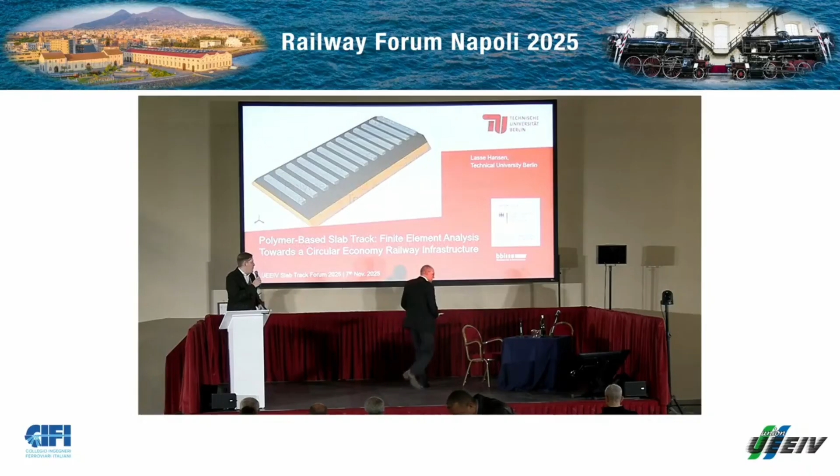Yeah, thank you very much, Olaf. I hope you enjoyed your lunch and you're feeling energized for the last session. At this point, thank you very much to the organizing committee. I'm really enjoying the conference so far. And yeah, lunch was great, but it's not the only thing which was great. So thank you very much at this point.

I will go into a polymer-based slab track, like it's written here. The idea is maybe on this first slide, and I will go through that and show you what the idea is and what I'm doing at the moment at Technical University of Berlin.

Of course, like Olaf said, slab track could be implemented into public transport and into high speed as well. And because the system is new, we know composites maybe not having, or material quality is an issue sometimes, especially if you're inventing new material compositions. So a first step could be in public transport because of lower axle loads and lower speeds, and that's why I'm going to present it to you now.

As I said, the first idea was when I was working for Deutsche Bahn at the high-speed line between Berlin and Munich. Much slab track was implemented or installed, and at the same time polymer sleepers appeared. And I was thinking about, in view of circularity, in view of resource usage, in view of elasticity, if it's possible to combine polymer material, composite materials with slab tracks, and implement it not just in ballasted tracks, but also in slab track.

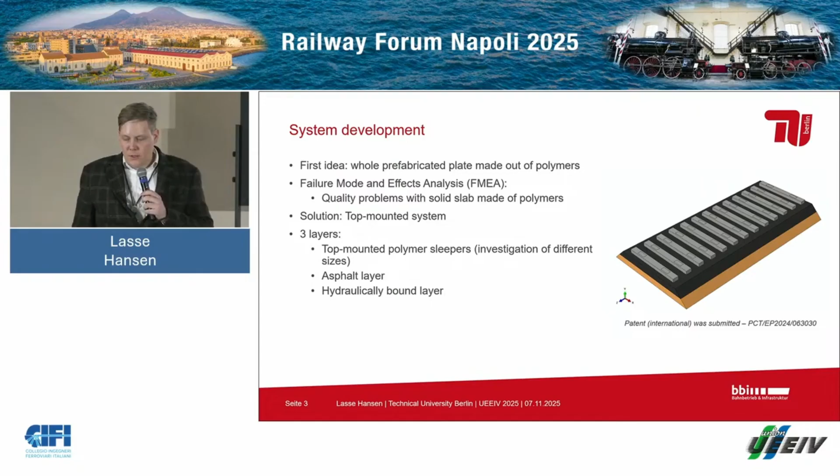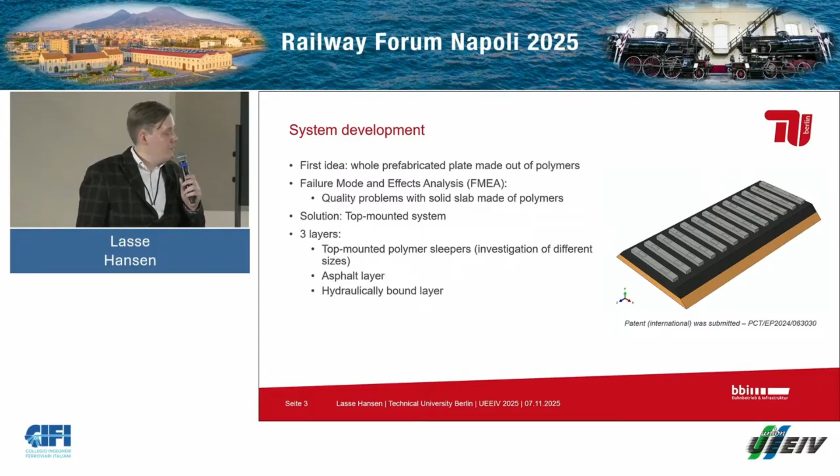So the solution, the step was to go into a top-mounted system. We also heard about some systems presented here. And asphalt has good circularity, also within streets it's well reused. So the idea was to substitute the top-mounted blocks with composite materials. In total we see on the right the 3 layers: the top-mounted blocks or sleepers, then the asphalt layer, and the hydraulically bound layer.

Then the title is FE analysis, finite element analysis. What you need for that is material data. Thanks to good literature, Professor Freudenstein is here, so thanks for the work, I could look up many things, also from Mr. Eisenmann on asphalt layers, hydraulically bound layers, also elastic foundations, and in the guidelines and standards of DB, and also guideline 16,432.

The Euro standard, European standard - you can see these different material data here. On the top, I wrote down sleeper composites. As you may know, there are different producers of sleepers made out of composites or polymers.

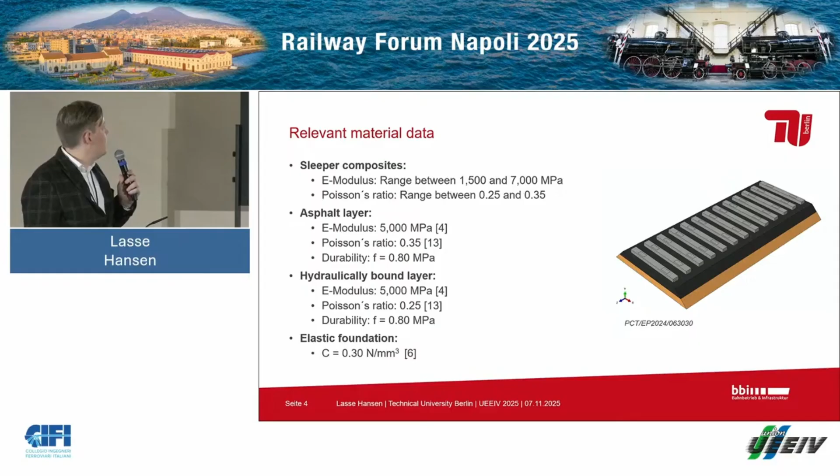So it's often a range, because it's depending on the material mixtures, for example which E-modulus or Poisson's ratio is appearing. Based on literature and material data, there's a range between 1,500 and 7,000 megapascal in E-modulus, and a range between 0.25 and 0.35 Poisson's ratio, based on how the mixture of these composites is at all.

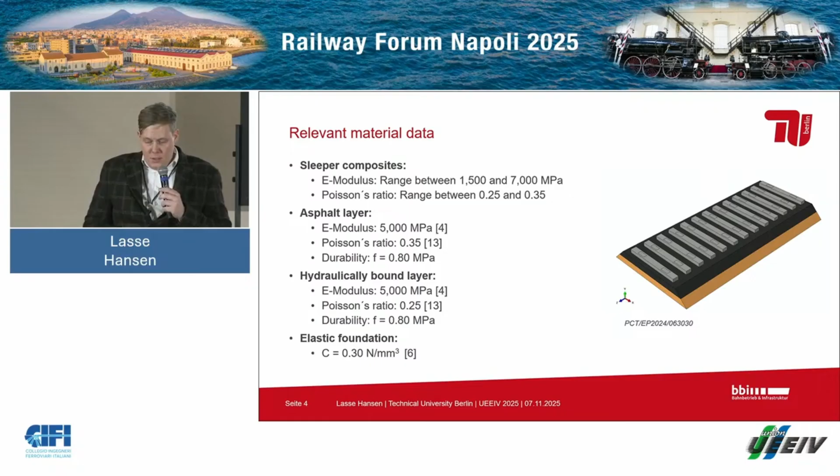Second, the detailed material data. So what we did - we have a material which is combined, or which contains recycled glass fibers out of rotor blades, and also recycled polymers. We did some testing, including dynamic testing, with a specimen to get the material data.

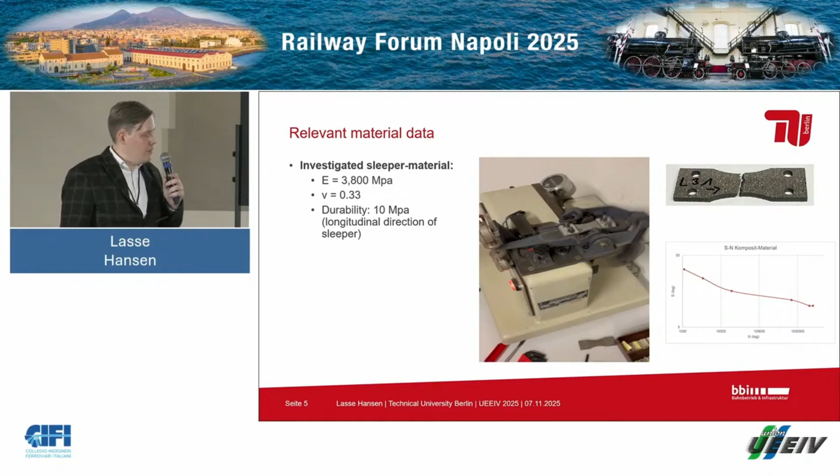On the right you can see a Wöhler curve. Our investigated material has an E-modulus of around 3,800 megapascal, and a Poisson's ratio of 0.33. We found with this dynamic fatigue test that around 10 megapascal is the dynamic durability. So these material data got into the analysis.

Then, as I said, I based that on what is according to guidelines, and there you can find the different loads per rail seat. You can see the basis is of course the UIC 71, especially if you're going to high speed or big trains, I would say.

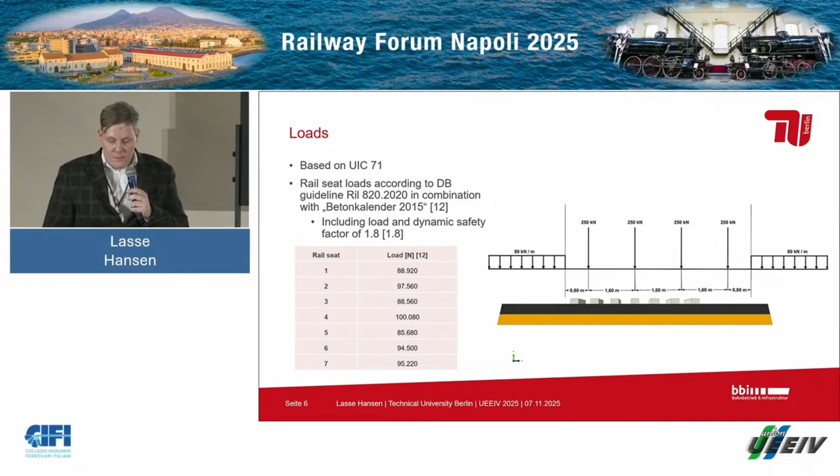But it's interesting to look at this dimensioning and maybe compare it, or transform it, to public transport as well. For the dynamic safety factor and also for load factors, you can add these 1.8 safety factors, and then these loads appear per rail seat, and you should focus on 7 seats.

Yes, so the dimensioning at all is based on the beam on Winkler foundation, because we're having this asphalt layer, and it was also transferred to railway by Zimmermann and then to slab track by Eisenmann.

And it's interesting to know if the appearing tensions within the supporting layers, assuming the loads, are lower than the durability of this material, and the same for the block which is top mounted. These two parts were analyzed differently.

And then also verified against the laboratory tests we did in the end, to see if the analysis, or the FE analysis, is sufficient.

So here are some results for the supporting layers. As you can see on the right, these are the two supporting layers. The load is applied directly on top of the asphalt layer because you want to get the tensions in the worst situation, I would say.

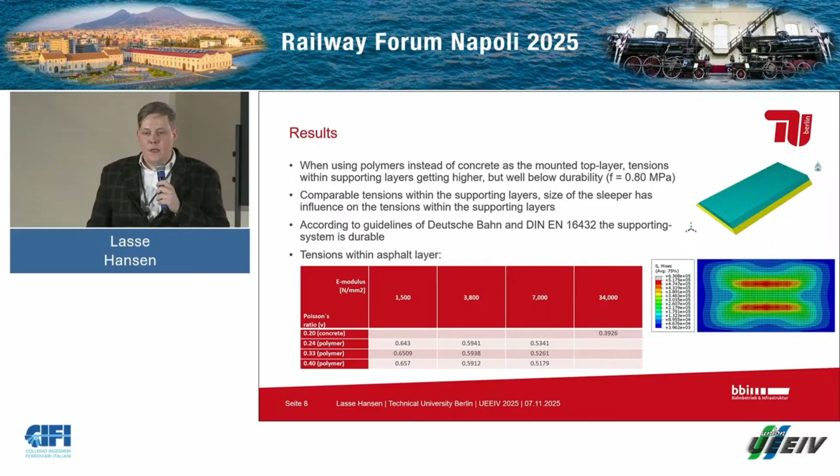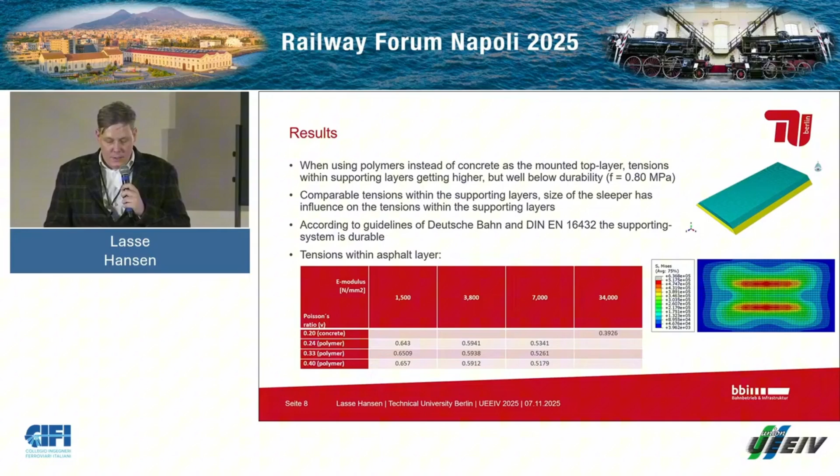It has to do with the load capacity, or the load spreading, and the elasticity of the block on top, but at all, it's well below the durability.

Then second, the top-mounted sleeper needs to be investigated. As you can see, the maximum tensions appearing within the sleepers are around 1.3, 1.4 megapascal, or Newton per square millimeter. As I showed you, the durability is at around 10. So we are well below this durability, also dynamic durability, and in this case it will be durable.

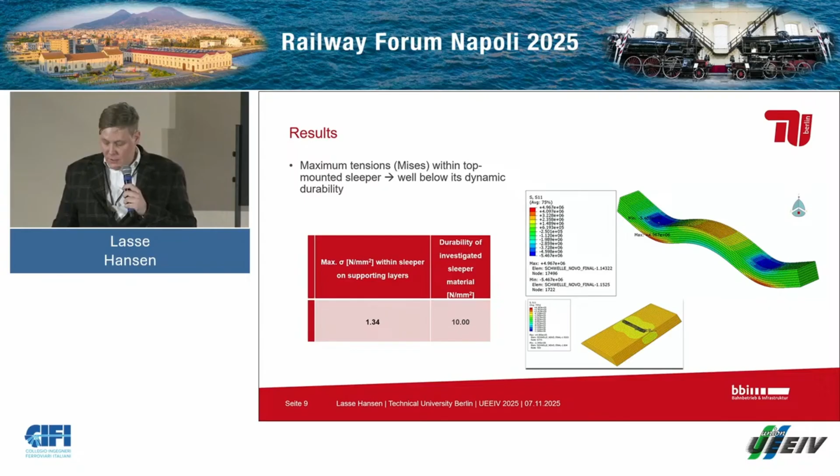As I said, we also did the verification. As you can see, we have rail seats, so the current normal seating for polymer sleepers. I know Vossloh is doing some research, or also producing with direct fixations, but at the moment for our lab test we had to use these rail seats, and we put on the maximum rail seat load of 100.08 kilonewton, which I showed you before, which is the highest load.

We compared it to get the gauges, the strains. So we placed strain gauges around the seat, as you can see in this picture, and got the different strains around it and compared it to the ones appearing in the simulation. We had an accuracy of around 3%, somewhere a bit more, but this was because of torsions.

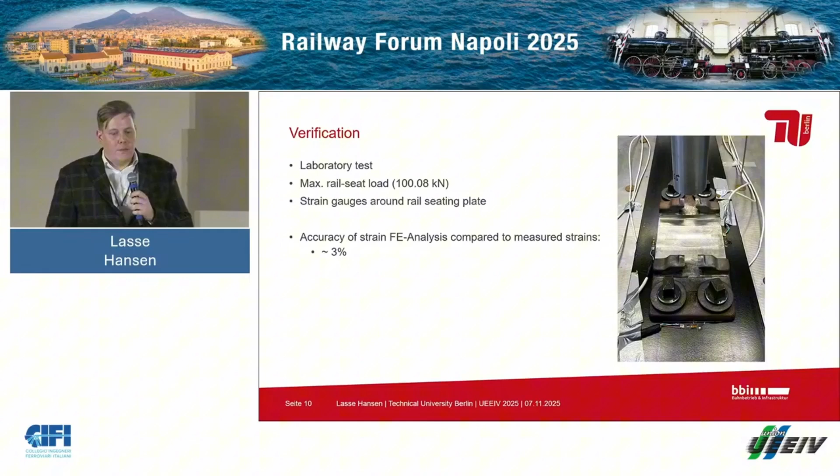I have a picture of this later on. So some sleepers had a small torsion, as I said, because of the cooling. Sometimes they're getting some torsions in it. But overall it was around 3%, so good accuracy, which showed that this data we got could be transferred to real life.

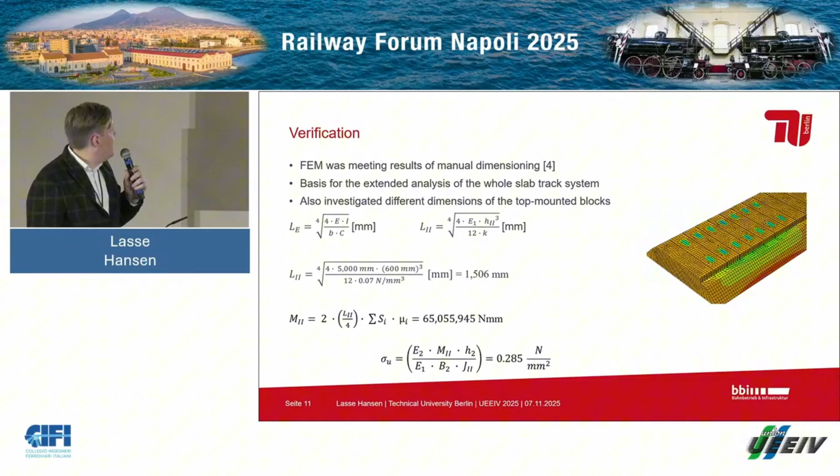Also a second verification against the manual dimensioning, which I said is based on Eisenmann and Zimmermann, and yeah, it was quite the same, and this was then the basis for the results I showed before. So we did the verification against the manual dimensioning as well.

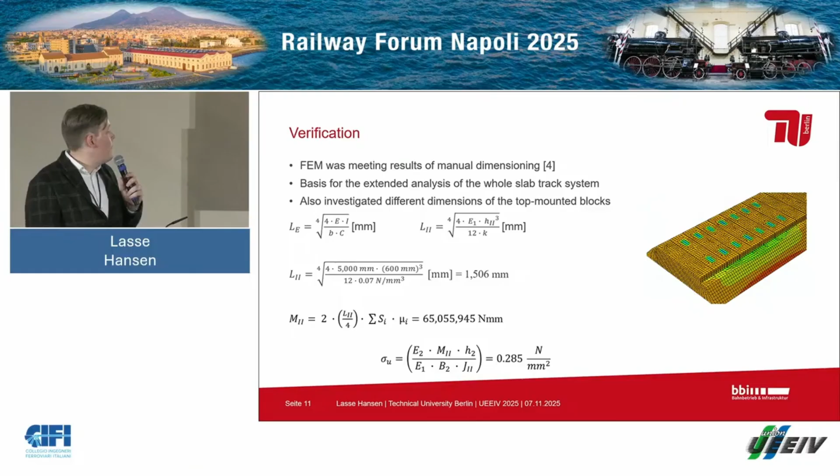As a conclusion, we took the requirements of European Standard 16432, as I said, and the guideline of Deutsche Bahn, and had a look on that. Of course, these approved polymer sleepers could be durable within a slab track system. You have to take a look at adapting the block, and also you need to screw it down to the asphalt layer, so maybe just some blocks on the sole are not enough. You have to screw it down because of the lower weight of the polymer, to get all the resistance you need in lateral and longitudinal ways.

But in combination, weather resistance is of course a topic, especially looking at the guidelines or the standard. You need to cover 50 or 60 years, depending which one you're looking at. This is something this polymer sleeper needs to face, and of course research is needed in this case.

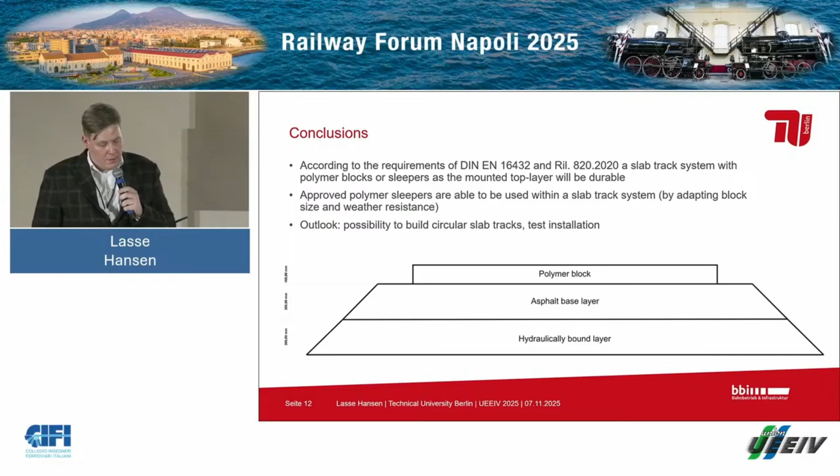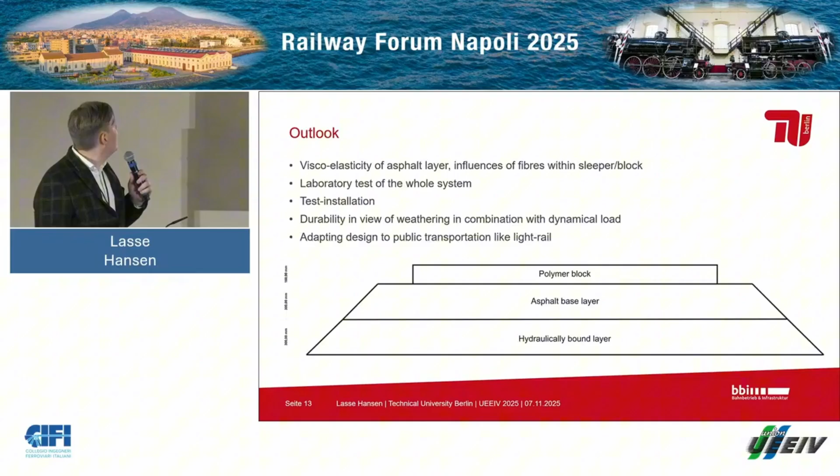The outlook is the possibility to build a circular slab track and a test installation, I also have it on the next slide. Some other outlooks: viscoelasticity of the asphalt layer, and also the interdependency between the mounted top block out of composites and the asphalt layer could be interesting to investigate more. Also influences of fibers within sleepers and blocks, sometimes anisotropy - this could also be a research topic for the future.

This whole system could be tested in a laboratory test, also these interdependencies between block and asphalt layer. A test installation, as I said, hopefully not in high speed the first time, but maybe later on. And durability in view of weathering in combination with dynamic load especially. Maybe adapting the design to public transportation like light rail - then you need different surfaces and stuff like that. Could be something for the future.

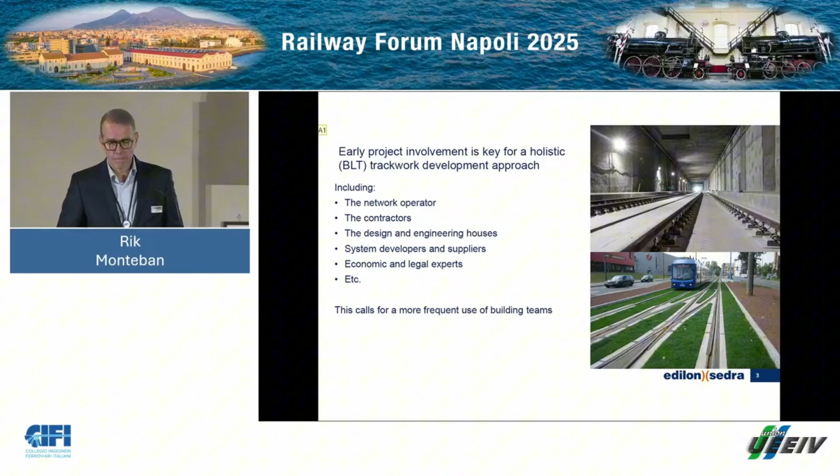Can only be made based on the complete trade-off matrix, combining technical, aesthetical, economical, environmental and performance requirements. Bias, opinions, preconceptions, assumptions, you all have experienced those from your customers or co-workers, form the ultimate risk of the final development of a slab track project. But it is a mutually agreed involvement, interpretation of those aspects that truly add value to the envisioned outcome.

Slab track is developed by edilon sedra for almost 5 decades already, and we built up a huge field of expertise for these applications. Also for metro, mainline, tunnels, depots, stations, level crossings, etc., and urban slab track at the same time.

This vast knowledge and experience is being put into use via our application and engineering team and other supporting technical colleagues, and is also translated in technical support services with a focus on the appropriate application of the edilon sedra system portfolio.

Also on that aspect, I discussed with a few visitors that has shown an interest in our booth, that we as a system house do supply systems that are validated, developed over the last 5 decades, but also the added value, as mentioned before by other companies, is a very important aspect of the collaboration.

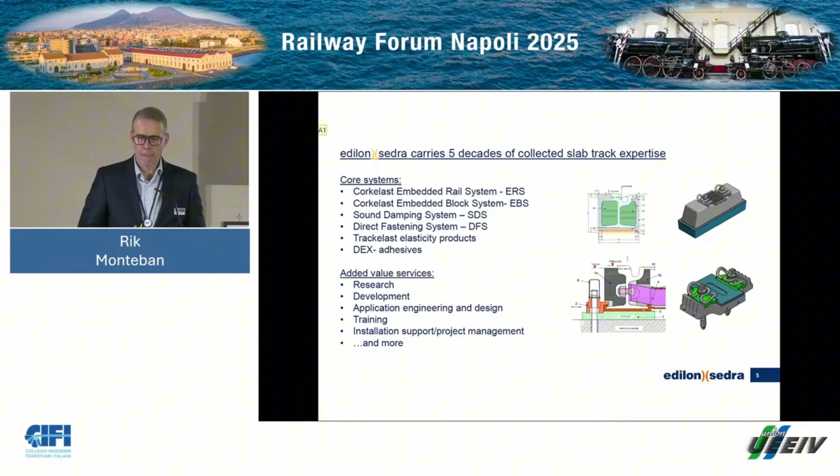Construction of slab track can be done in many ways, obviously. Also, our colleague companies have shown several possibilities to do that. The use of prefabricated elements becomes increasingly popular for many reasons, although some advocate against it, often for the wrong reasons or interpretations or opinions, as mentioned before.

And here, just a quick overview of some examples. Here you can see pre-embedded rail in steel channels that can then be casted in locally. Slab track for container terminals, completely pre-assembled level crossing elements, a complete embedded rail bridge that will be hoisted in.

Steel decks that can be prefabricated, and also urban track, as here seen in the city center of Birmingham, with turnouts included as well.

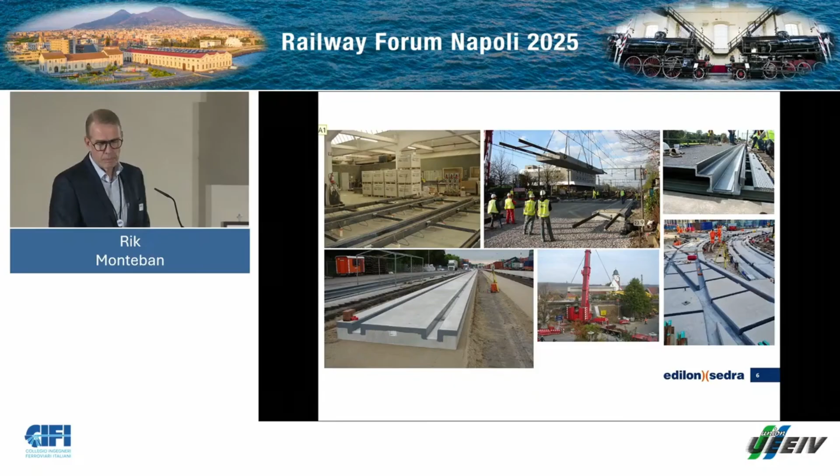Construction of the presentation is a little bit mixed up, as you have noticed probably, so I'll try to find my way through it.

This overview shows a few other examples of prefabricated elements in different forms and shapes. In this case, you can notice prefabricated steel channels, either including or excluding reinforcement. And the smaller pictures beneath it also show that we can also include all kinds of finishing in the designs, which is elementary for urban slab track development.

So cobblestones, asphalt, green track, you name it, it can be included in the design. And every question that you would ask, can we include this, can we include that, drainage, cabling, etc. Yes, we can, because it's all a design aspect.

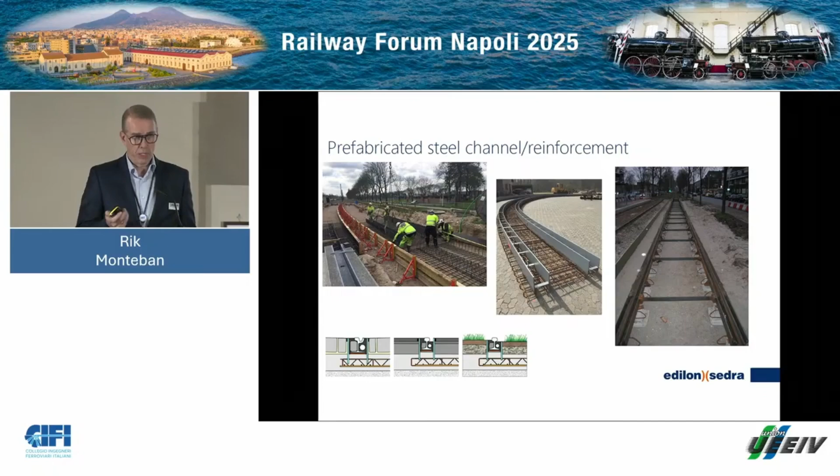And then we have to discuss where the drainage has to go and which kind of cabling you require. This shows prefabricated concrete channels. Also the same background, all kinds of finishes, the surrounding dimensions, rail profiles can be included in the designs to your requirements.

Also important to mention, there have been a few presentations about mass spring systems. In the edilon sedra portfolio, we also provide mass spring system materials called Trackelast range. You might have noticed that on the previous slide on our portfolio.

Our starting point is actually to see if we can avoid a mass spring system by tuning the top fastening system and prefabricated elements. That's not always achievable, but we have one excellent example in Gothenburg, the Skeppsbron project, where we used a very elastic system for a tramway where we could avoid a mass spring system as a construction element, which saves reinforcement, saves workforce, etc.

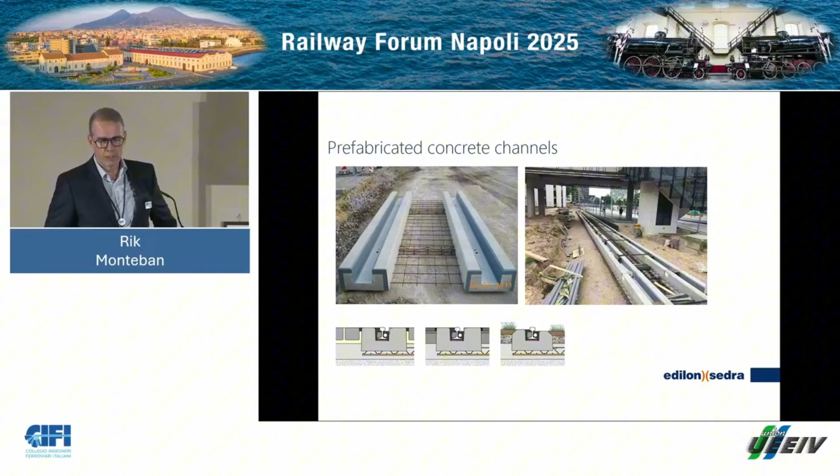So that's where we start in looking at our design collection. And then the full concrete slabs, typically suitable for urban track as well, with mixed traffic. Also here, all kinds of designs and inclusion of finishes are possible, either placed on leveled sand or grouted for inclinated track, for example, and also, as mentioned before, container terminals, depots, etc. Aprons can be built with these solutions.

One of the commonly used edilon sedra rail fastening methods in BLT for both in situ constructed slabs or prefabricated elements is the Corkelast embedded rail system, for the beneficial properties it offers. On this slide you can find an overview of typically addressed elements and aspects for slab track construction and design.

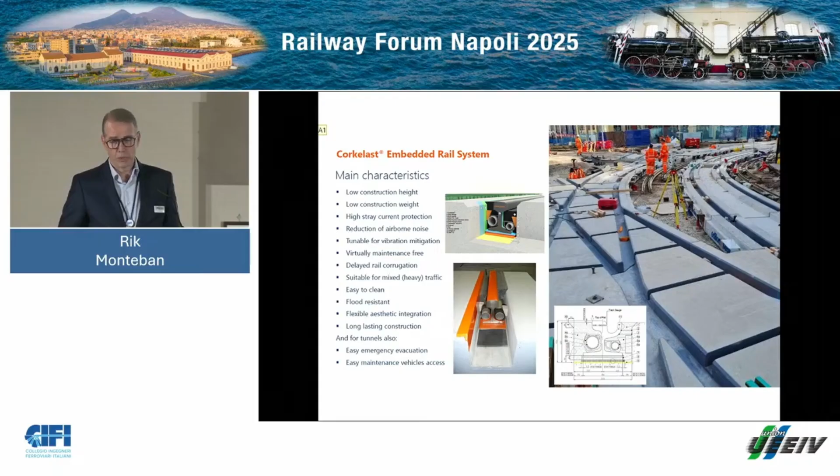Not all of these on the list are always required to become a benefit, because if you don't need it, it cannot be a benefit. But what we also have learned, going through BLT project requirements, Corkelast embedded rail should be capable to tick off all the boxes for any project requirement, as we speak.

Edilon Sedra has now developed the next step of prefabrication of slab track elements. And this is the point for the presentation, to show you something new as well. We call it Corkelast Embedded Rail System Modular, because we prefabricate pre-embedded rail sections, or modules.

The process of conditioning the installation environment, preparation, mixing of the components, pouring, curing, are all taken care of before the actual in situ installation takes place. This assures 100% quality supply. Nothing will leave the factory before it's okay. Consumption and cost are controlled, and time is also saved during installation, which is an often heard disadvantage of embedded rail, is the time of installation.

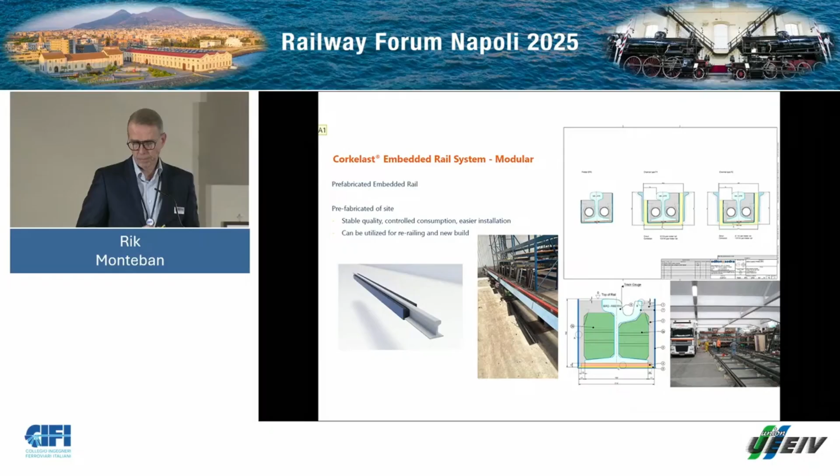Benefits of using ERS-M building methods of embedded rail combines typical prefabrication benefits as mentioned before, and a few more in addition to that, as shown on this slide as well.

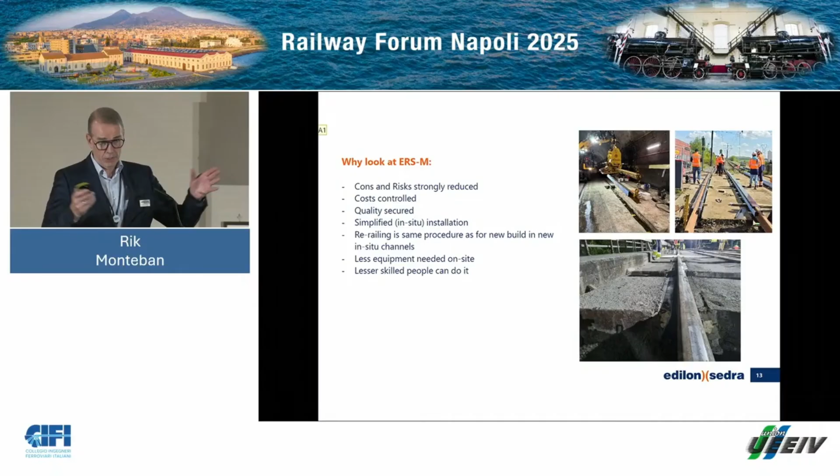And what's an interesting aspect that we learned during the development and trial installations, is that we also tap into availability of workforce, skilled workforce. For installation of embedded track in situ, you need trained, certified people. For the installation of ERS-M, so prefabricated embedded rail, you don't. It must be people that understand track installation, but it must not be certified embedded rail installers. So that expands the possibility of putting a workforce on the project.

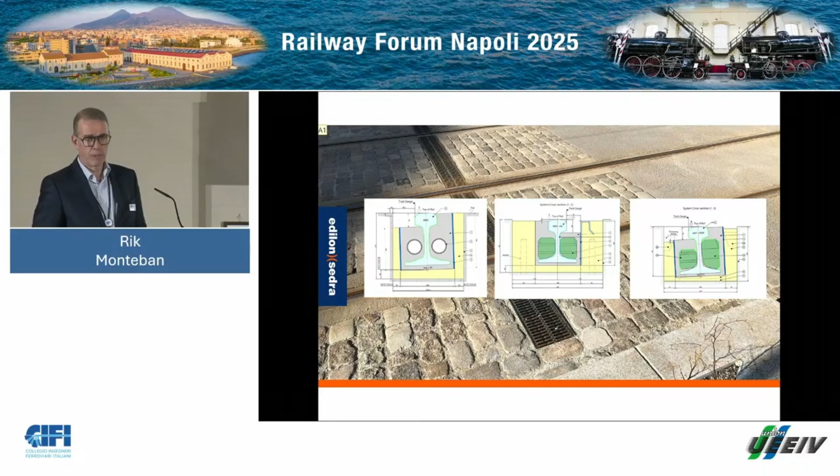With this newly developed and patented building method for embedded rail fastening in slab track, Edilon Sedra has made the next step toward innovative and sustainable slab track development. And here you see a few examples of what it could look like.

And that's my presentation. Thank you very much for your attention.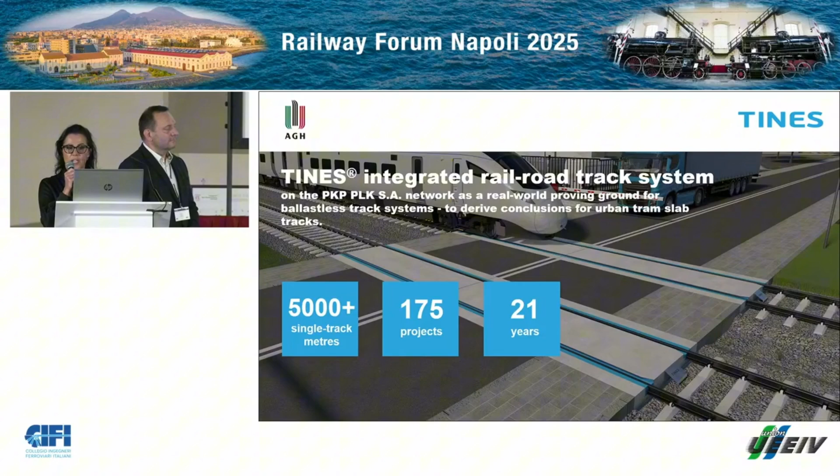The subject of our presentation regards solutions for tram slab track structures. It's also worth mentioning TINES' 20 years of experience in railway surface engineering, which brings conclusions for urban tram slabs.

Hello, my name is Michał Strach. I represent the AGH University of Krakow, working in the Department of Engineering Surveying and Civil Engineering. Professionally, I'm a surveyor.

I'd like to tell you about R&D in cooperation with TINES. The TINES technology creates durable track structures for railroad crossings, consisting of a prefabricated concrete slab and an embedded rail fastening system. To mark its 20th anniversary, TINES commissioned the Railway Institute to run a nationwide in-service survey of railroad crossings.

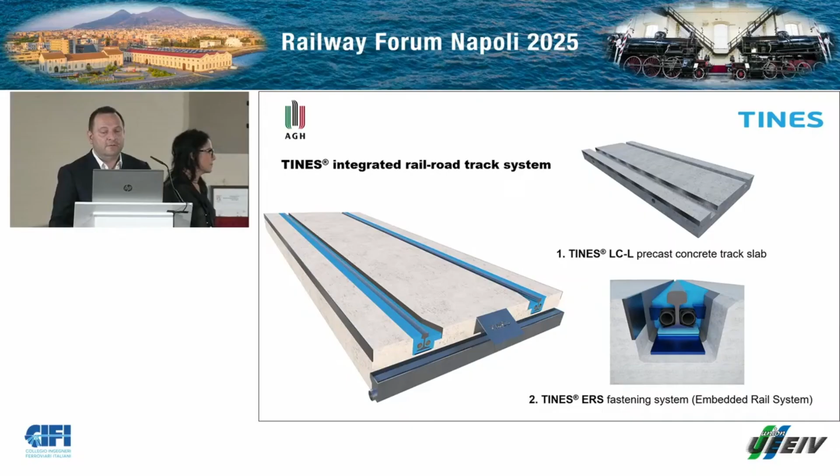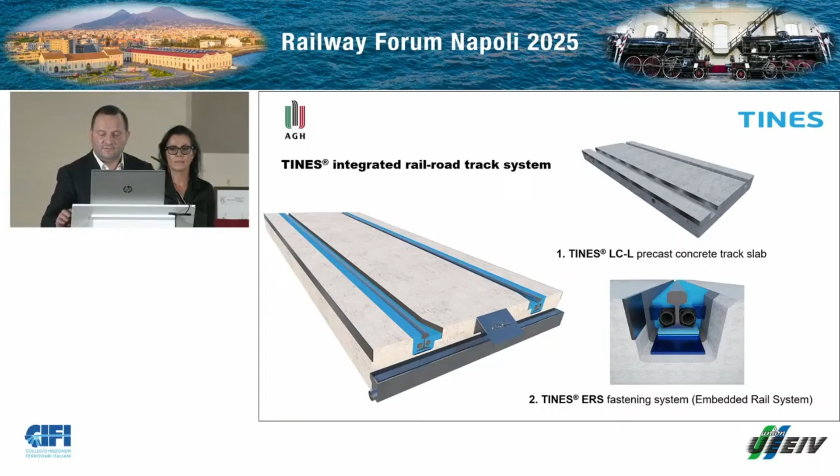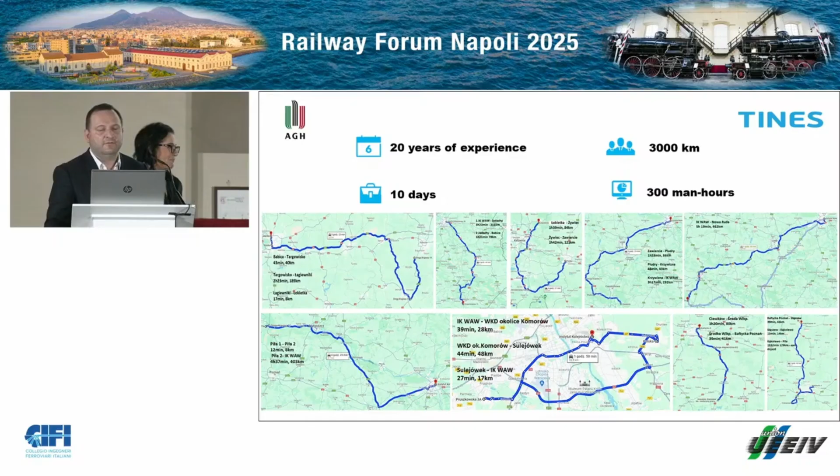From 175 sites, the team selected 20 with the presented design and conducted a full measurement campaign at each. This team covered different regions, about 3,000 kilometers in 10 days, logging roughly 300 man-hours.

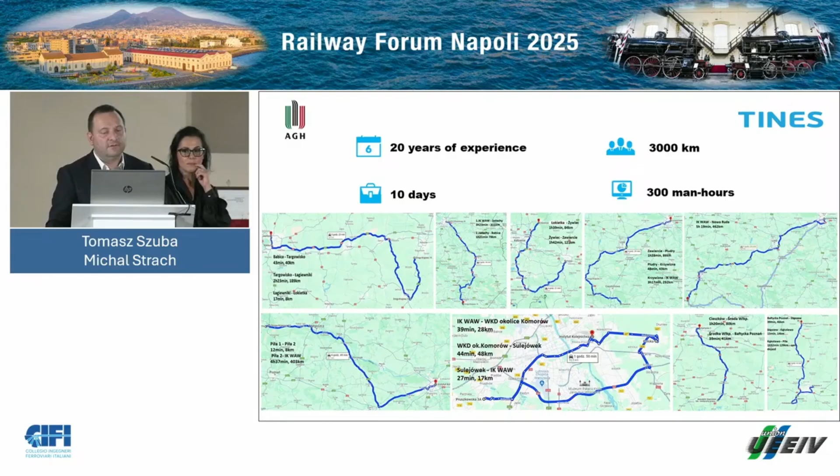A nationwide survey focused on railway solutions. A uniform measurement protocol at each crossing enabled cross-site comparison and highlighted the main durability drivers: slab roadway joints, drainage condition, and fastening system condition.

At each site, precision leveling was carried out across the crossing and transition zones. Track gauge, cant, and twist were measured, and the slab's fastening system components, the slab-asphalt joint, and drainage were inspected. This consistent protocol allows reliable comparison between sites.

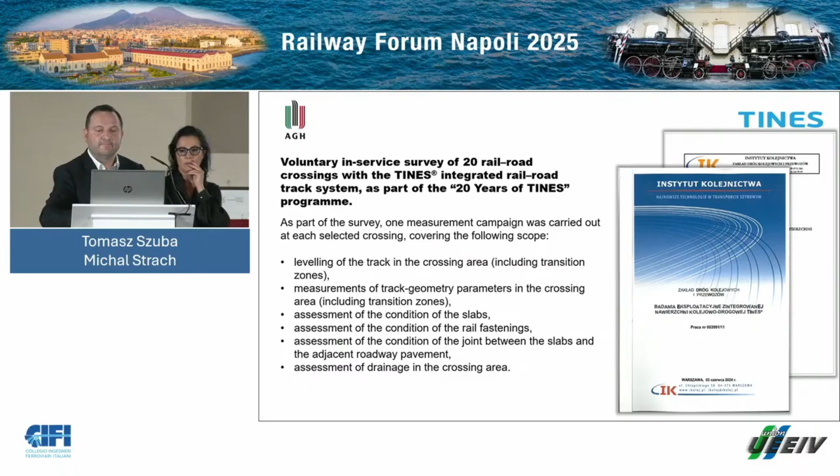This is the sample, which covers diverse traffic and ground conditions, including high traffic roads and several double-track locations. This diversity increases the external validity of the findings.

Across most sites, slabs showed no cracks, blisters, tears, or foreign inclusions on the running surface, and faces are protected with cover plates. Local issues were linked mainly to the slab-asphalt joint and edge loading. The fix is straightforward: restore joint sealing, repair adjacent asphalt, and keep drainage effective.

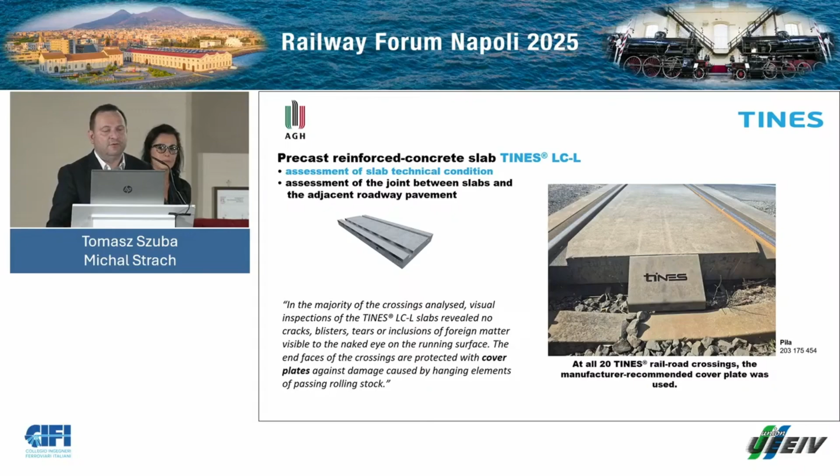The slab-roadway joint is the most sensitive interface we observed. Loss of sealing allows water and fines to enter, which accelerates edge distress in the asphalt and undermines support at the slab edge. Our recommendation is to restore sealing compounds, repair adjacent asphalt where needed, and include routine inspection of this joint in the maintenance plan.

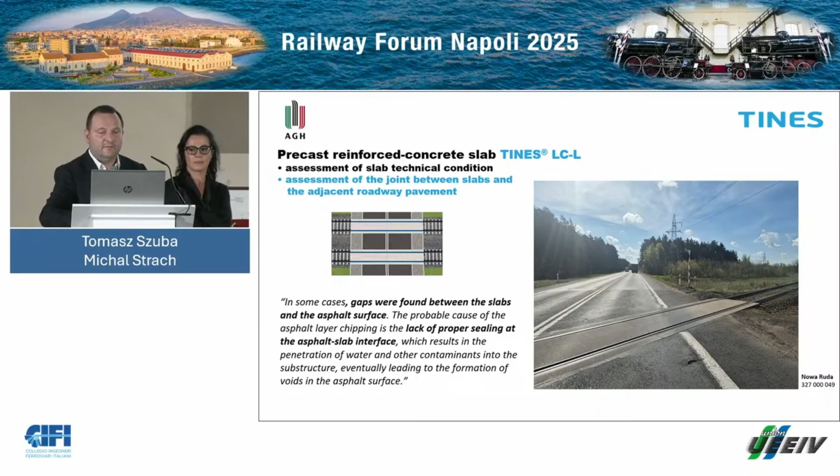Drainage is the most common weak point around the crossing. Missing channels or clogged rail grooves allow water and fines to migrate under the slab, accelerating edge distress and sub-base softening. The recommendation is to design and maintain dedicated drainage, keep grooves and inlets regularly cleaned, and include this task in routine maintenance plans.

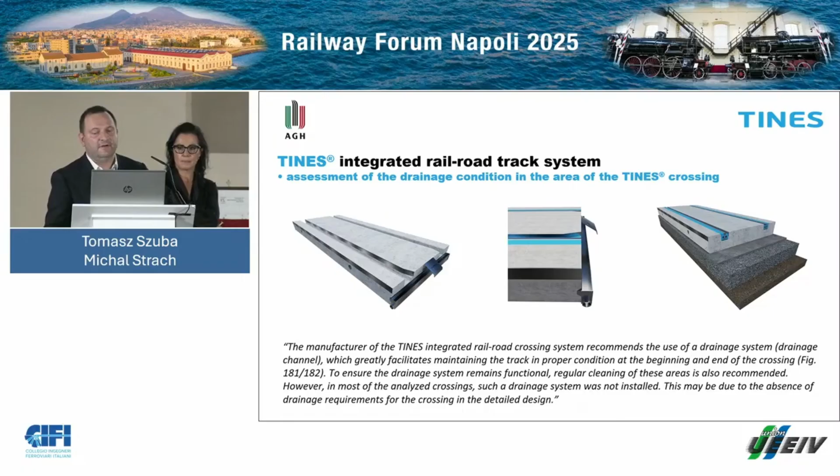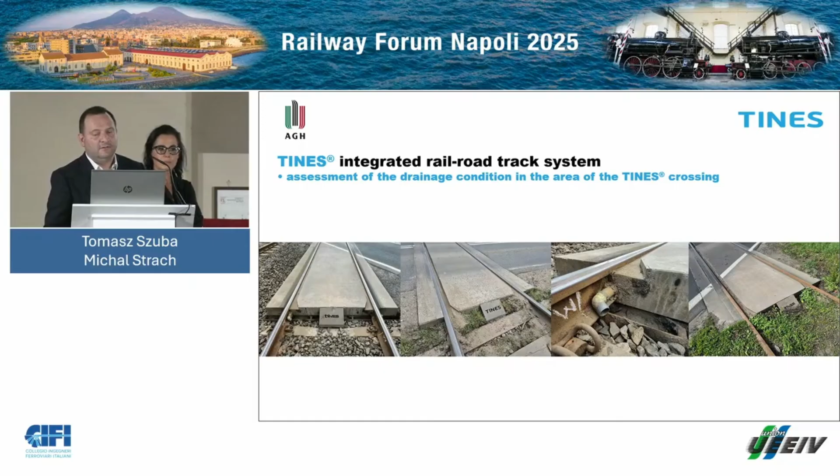These photos show typical drainage weakness around the crossing: missing approach channels and clogged rail grooves, which let water and fines migrate under the slab and trigger edge distress. Our takeaway is simple: design dedicated drainage into the crossing and ensure regular cleaning and inspection is part of routine maintenance.

The elastomers serving as elastic mounting and support are generally intact. No cracks, delamination, or functional deformation were observed. Isolated defects point to deviations from installation procedures rather than a system issue. We recommend strict QA/QC during casting and bonding, with prompt local repairs.

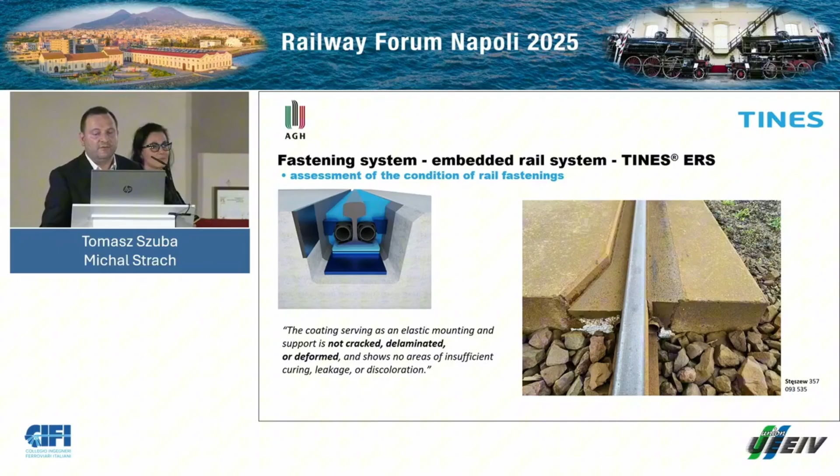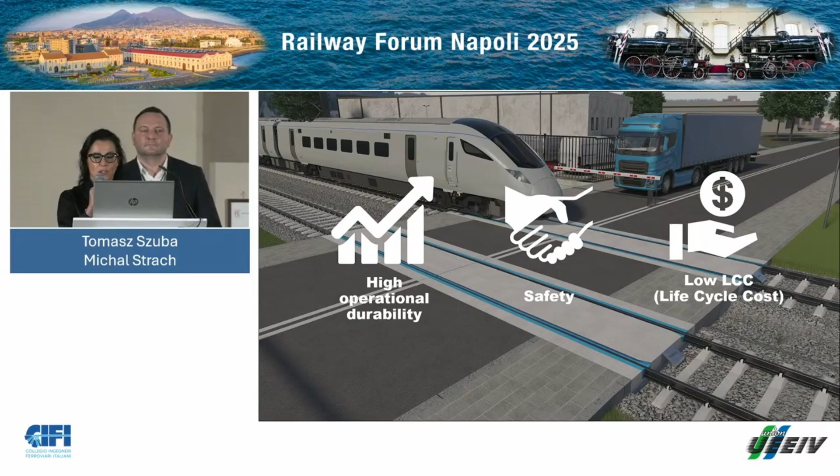So why has the Professor spoken about railway? We wanted you to see the results of voluntary tests which Tomasz made, and many years of real-world operation of the railway solution, so you could see how level crossings under heavy rail conditions became a true testing ground for ballastless track technology, confirming its durability, stability, proper track geometry and safety, and also life cycle costs.

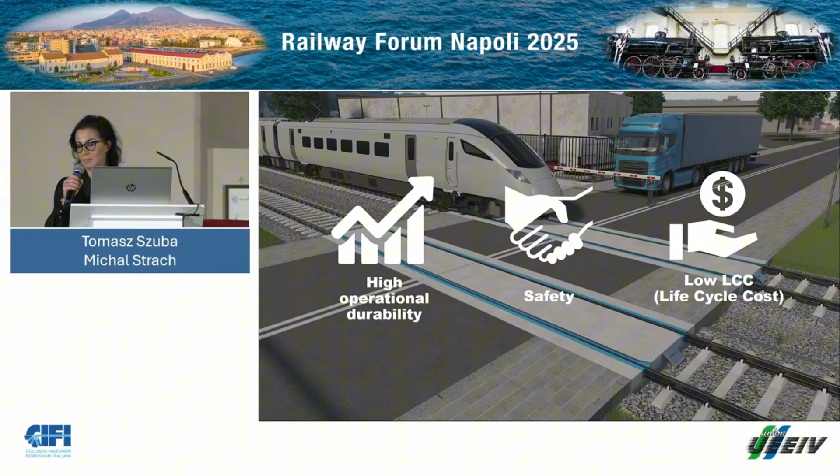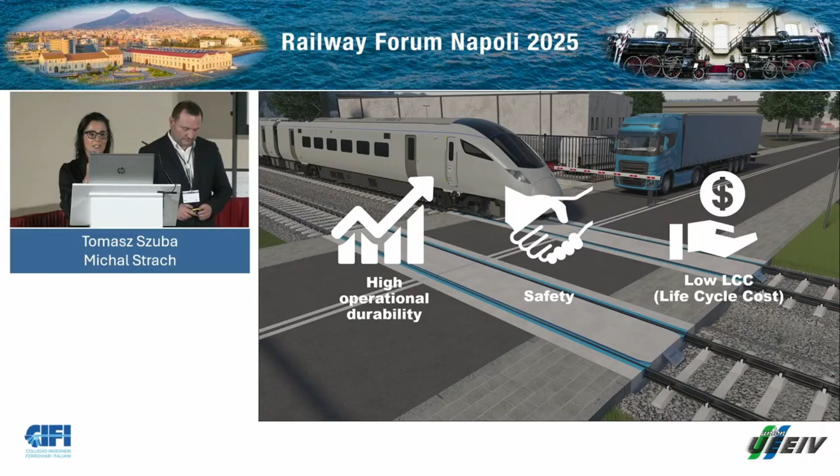This experience, with present and future implementation which Mr. Michał showed us, gives us something extremely valuable. It allows us to transfer the approach and technologies proven in long-term railway operation into the urban environment, where track infrastructure must safely integrate with the city's public space. We are able to successfully carry over the strict railway requirements for safety, repair construction time, long-term service, and additionally for vibration and noise reduction, which is very important in cities, especially old cities with pre-war buildings. So now we are going smoothly.

What, in our systems, connects the railway with tram? It's our polyurethane elastomers, which we produce in Krakow. We use them both in railway and in tram track systems.

The Tines Polyrail set consists of proven polymer and epoxy materials that can meet the needs of even the most complicated track infrastructure projects, and also customized projects, because we have our own laboratory and our technologists are working all the time to improve these products.

Based on more than 20 years of experience, we want to show you what we believe is the best solution for the urban environment. Let's show it on the slides.

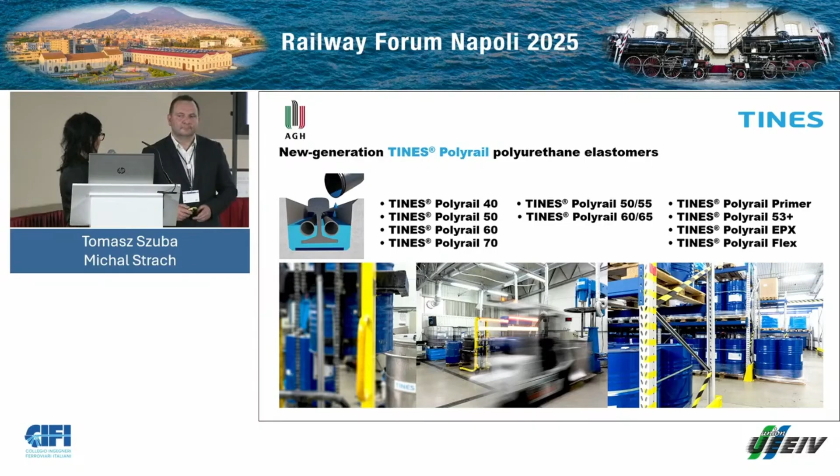Tines Tram integrated tram road track system is a complete solution built upon railway experience gained during the construction of level crossings by Tines Rail, and adapted in terms of performance parameters to the requirements of tramway operation.

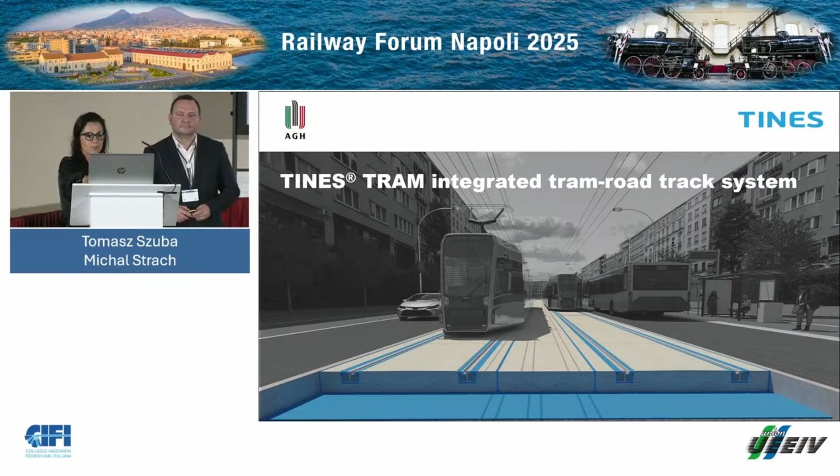What is also connected, of course, are slabs, but not so heavy, with a lesser amount of reinforcement inside. And the embedded rail fastening system, Tines Tram ERS, based on these polyurethane elastomers as presented earlier.

In our offer we have a lot of prefabricated elements used in tramway infrastructure, because we often work under modernization conditions, which means adapting existing infrastructure.

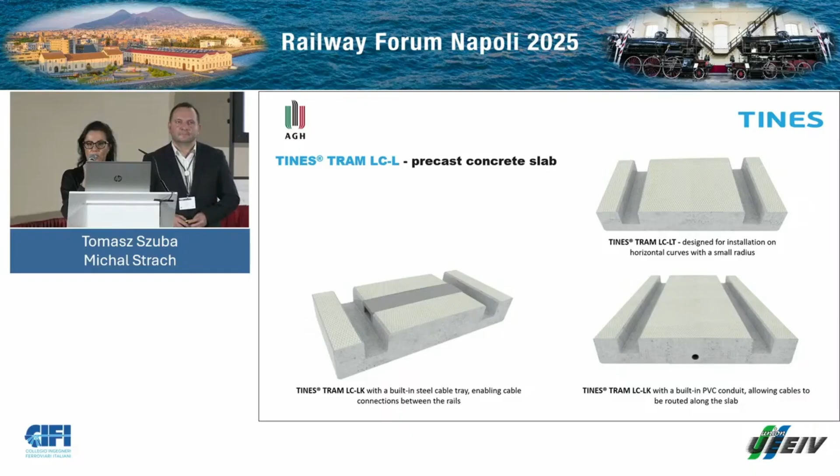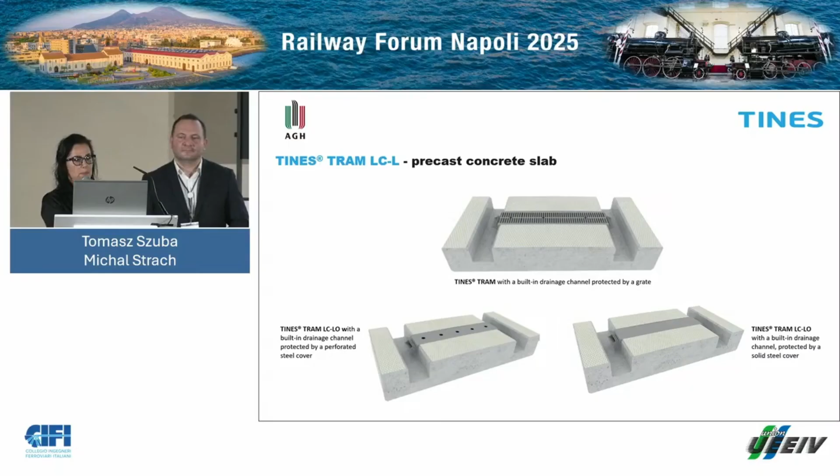Here you can see the slabs for channels, for pipes. This is also always adjusted to the project, to the requirement of the client.

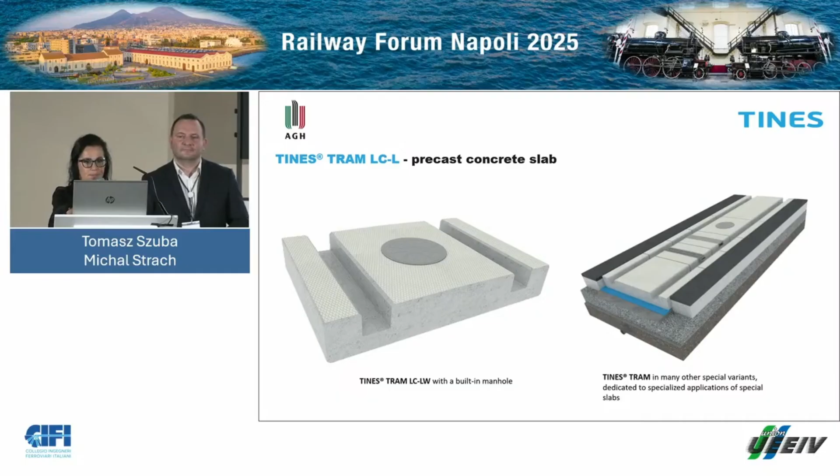The Tines Tram ERS fastening system is the first tramway fastening system in Poland to be tested and approved for operation as a complete structural solution, with verified and certified system parameters according to the norms.

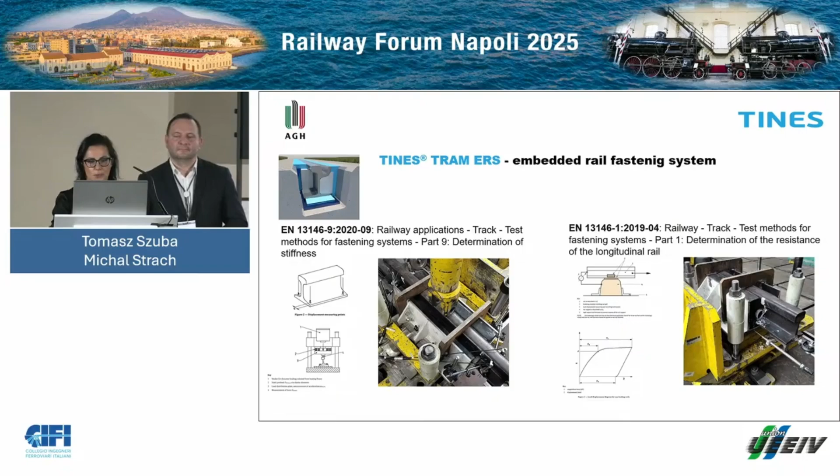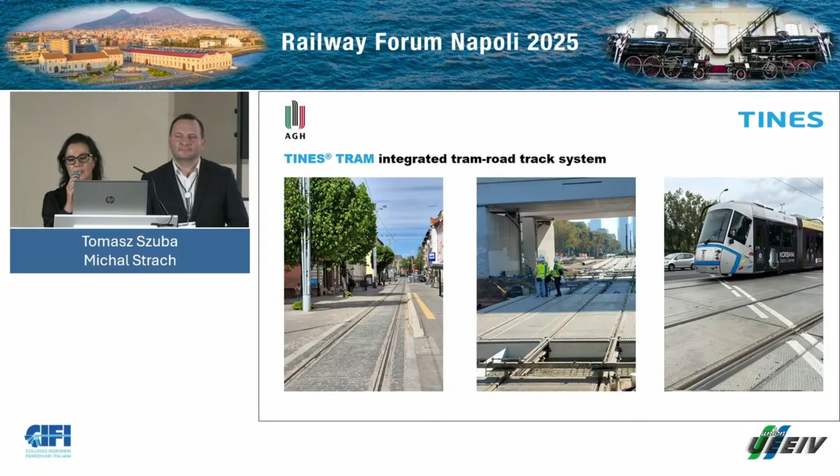This solution for urban infrastructure fits very well into the urban landscape, which is very important. The slabs don't have to be heavy, ugly, or crude like everybody thinks when we say concrete slabs. Everybody imagines something simple. So the slabs must have appropriate technical parameters, providing reliability and safety at the same time.

To conclude, we prefer slabs with an already shaped rail channel, because this technology reduces installation time. Generally, after 24 hours, we are able to reopen traffic on the prepared section.

As proof, we want to show you a short movie at the end of our presentation to illustrate this key advantage: the ability to very quickly rebuild a tram road crossing. This example we call the weekend metamorphosis, the transformation of a tram road crossing in Gdańsk.

In the end, we believe that the future of sustainable mobility relies on the integration of railway and tramway infrastructure, built on shared experience, materials, and best practice. In our view, rail and tram systems achieve the greatest potential when they grow together. Thank you very much for your attention.

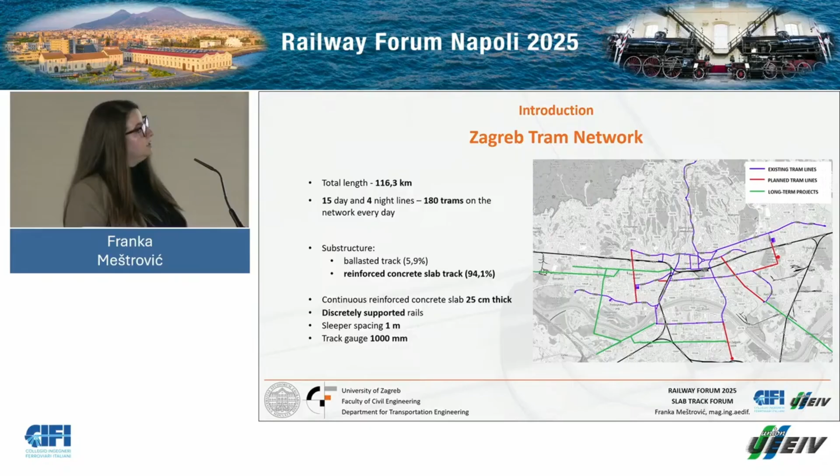Now I'll start with how and why my colleagues developed the 21 STT system.

Before that, all tram slab structures were designed for a wheel load of 20 to 25 kilonewtons per wheel. However, this tram had a load of 33 kilonewtons per wheel, which introduced main changes such as an increase in axle load, different load distribution on the structure, and due to different wheels being used, a change in geometry of the wheel-rail contact.

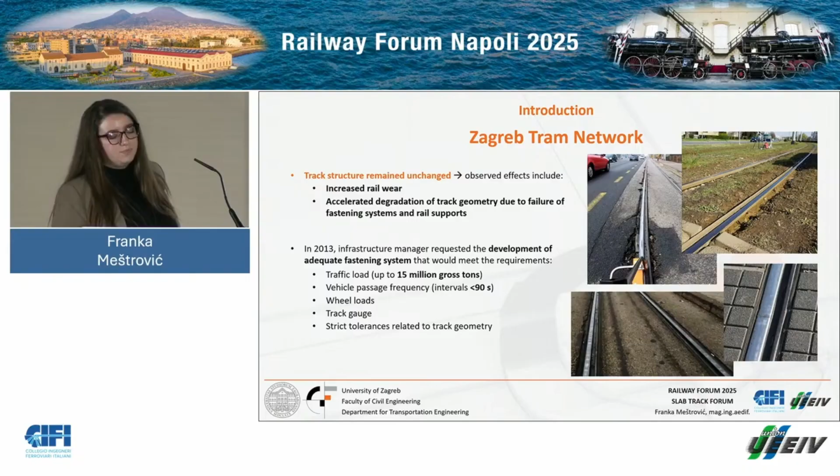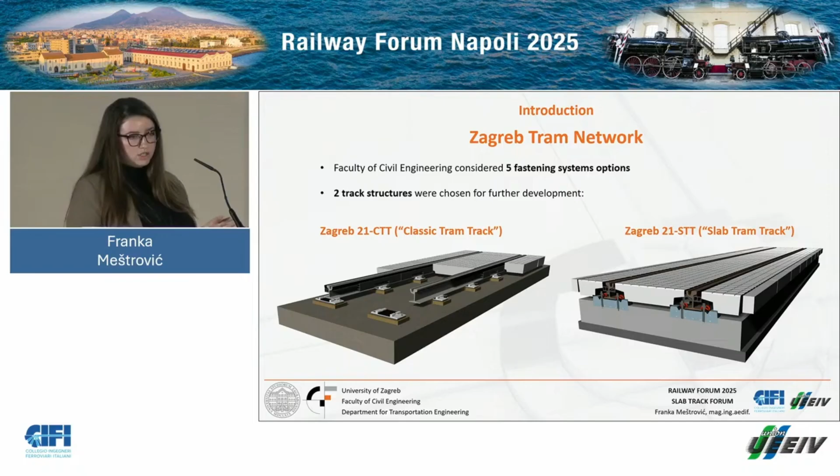They gave the Faculty of Civil Engineering the opportunity, and my colleagues, professors, considered 5 fastening system options. In the end, 2 track structures were further developed and researched. Those are these 2: the left one is 21 CTT, classic tram track, and the right one is STT, slab tram track. I will shortly describe each one, but the focus is on the slab tram track.

As far as the CTT structure goes, C stands for classic - classic in regard to the Zagreb 3/2 PP fastening system, the most used system on Zagreb's network, and this is actually an upgrade of it. The idea was to use easily available and standard railway components, and the main goal was reduction of noise and vibration, as well as protection against stray currents.

This system is most suitable for reconstruction of existing slab tracks, considering it's quite similar to it, so a lot of infrastructure managers, project leaders and workers are quite familiar with it. Also, it's used in road-rail intersections because it's suitable for switches as well as terminus areas. I'll show you in a bit what I meant by that.

Here we can see a 3D model of the structure. Bottom right is the ribbed plate with vulcanized pad underneath it, and in the cross section we can see that underneath the rail there is a neoprene pad. It's placed on a ribbed plate which has another level of elasticity - a vulcanized pad underneath - and then it is placed on a bearing pad and fixed indirectly with anchor bolts.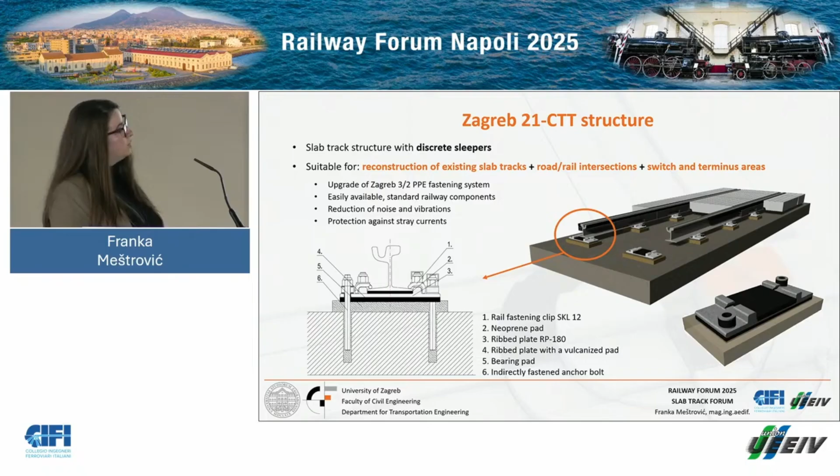On the other hand, we have a direct fastening system, that is the Zagreb 21 STT structure. It was based on a few track systems, but mostly on Rheda 2000. It is a structure with prefabricated double block concrete sleepers, especially suitable for open track segments where higher speeds can be achieved.

When talking about trams, those are still not the higher speeds we usually consider in railways. So this Rheda 2000 system was adjusted considering the track geometry - a 1000 millimeter gauge - loads much less than on classic railways, as well as vehicle speed. Average speed in Croatia for Zagreb trams is 40 kilometers per hour.

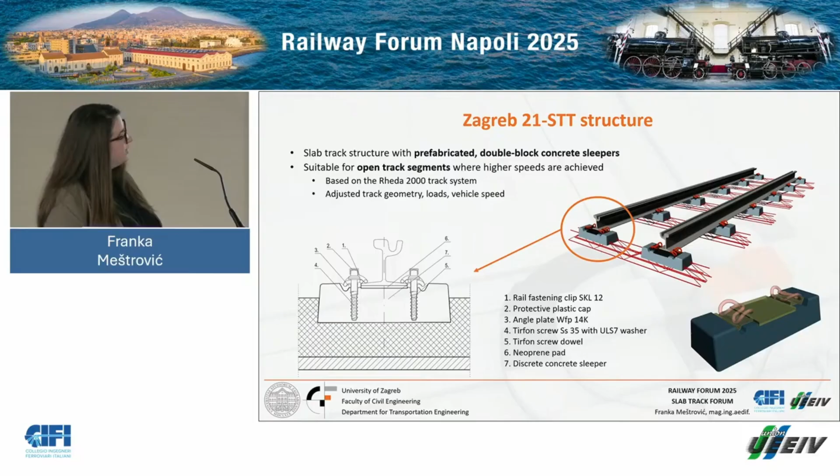In the cross section we can again see the rail and the neoprene pad. They're placed on a discrete concrete sleeper, and the rail is connected to the sleeper by a fastening clip and angle plate, and finally with Tirfon screws.

One of the big advantages of this structure is that it is prefabricated, but it can also be pre-assembled in 18-meter segments with the corresponding fastening systems, and then later delivered to the construction site. The colleagues also developed certain tools for adjusting the track alignment.

Before it could be implemented in a real case scenario, it had to be tested. So in 2014, 11 years ago, they built a test section in Savska Road, quite frequented by tram and car traffic. Three separate tracks were built: the PPE, the classic reference track most used in the whole Zagreb network, then the CTT system and STT, approximately 53 to 59 meters in length for each test section. Monitoring wasn't continuous, so it was periodic.

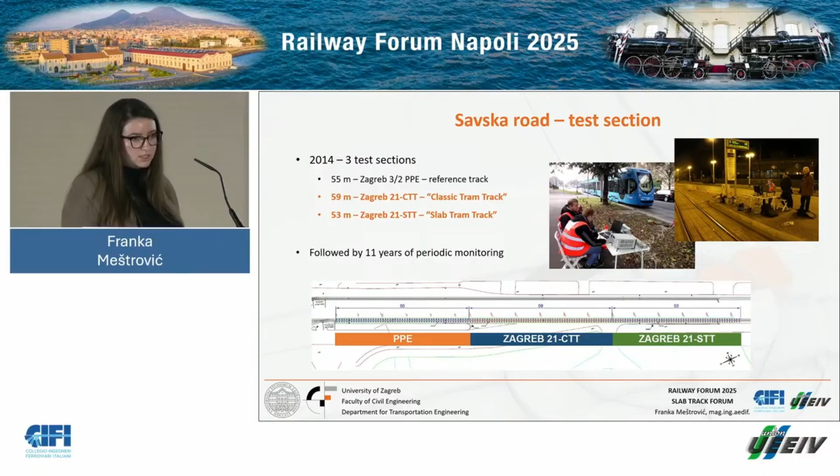These are some photos from the construction site when the first implementation was being done. I would like to emphasize that this was more familiar, as I mentioned, to the infrastructure manager, to the project leaders, as well as workers. So there weren't any significant problems during construction of this section.

While for the slab tram track, it was a bit challenging because it was the first instance of this type of structure being built in Zagreb, in Croatia. The idea is, on a hydraulically bonded layer 5 centimeters thick, sleepers are spaced each at 100 centimeters, and then rails are positioned on the neoprene pads. The fastening system is built and positioned, and when track geometry is achieved, then the concrete is poured.

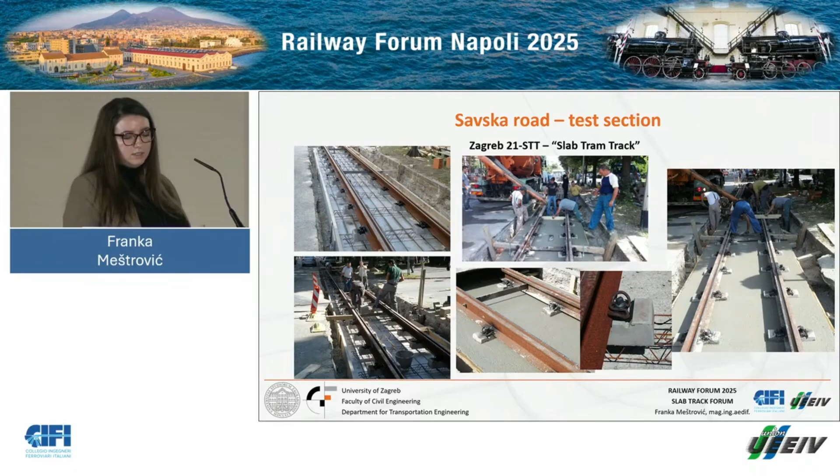Furthermore, measurements were taken immediately after installation. That was 2014, then 7 months after exploitation in 2015, and after 4 years of exploitation in 2018. By that time, almost 40 million gross tons had passed over the system.

Apart from visual inspection of the concrete slab and the bearings, fastening elements, rails, pavement, and elastomeric pads, some other measurements were taken. We measured track geometry, stresses and deformations of the concrete slab. They used strain gauges for that, and on the top two photos, I circled the rebar which was used for positioning the strain gauges.

Also, they measured the dynamic properties of the track, so TDR, vibration damping, by using accelerometers. On the bottom photo we can see their position, and there's a shaft next to the tracks where they reached to get the sensors. And of course, the noise generation was measured.

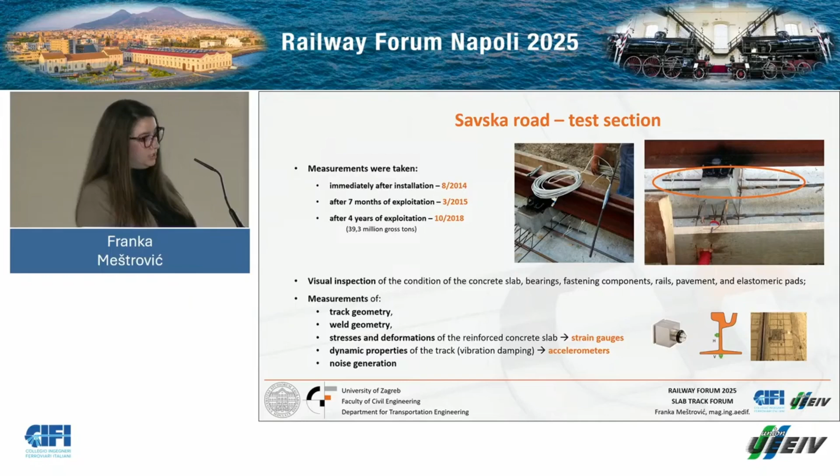I didn't want to put too many graphs because my presentation is last, and I think you've already had a lot of information, but the basic conclusion was that the STT performed the best, while CTT was quite similar to the PPE. I put here the best results, but I have to emphasize that all measurements were within the proposed limits. For example, increase in track gauge of 1,000 millimeters for PPE was 1.18 millimeters, while for the STT it was 0.92.

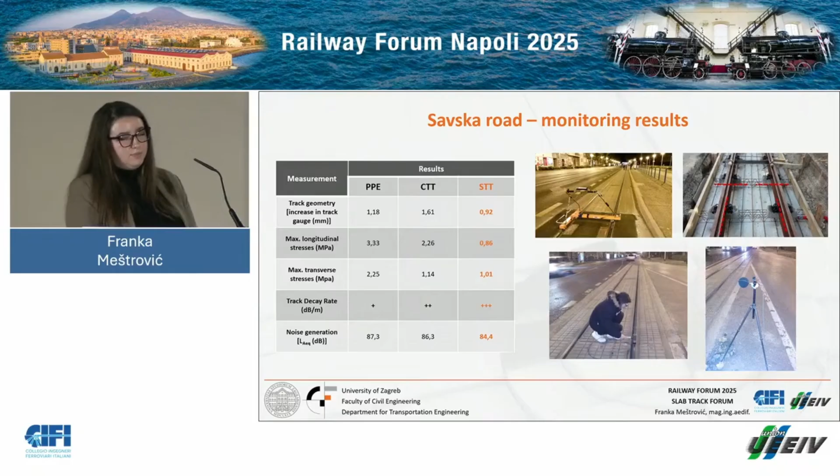As far as the maximum stresses go, longitudinal and transverse, again STT had the best results. For the PPE, it was 3.33 maximum longitudinal stress, and for STT, 0.86. As far as the track decay rate goes, we noticed that due to settlement of the structure, the values got better over time, but overall vibration damping from the STT system was most favorable. As for noise generation, the STT slab system lowered noise levels by 2.9, almost 3 decibels.

Following all those tests and measurements, the first project of these red lines which I mentioned, currently in progress, is the bottom one. It's called Sarajevska Road in Croatia, and construction started 10 months ago, in March. It's actually the first expansion of the tram network after 20 years, so the first new tram tracks are being built. The total length of the section is 2.4 kilometers of tram track.

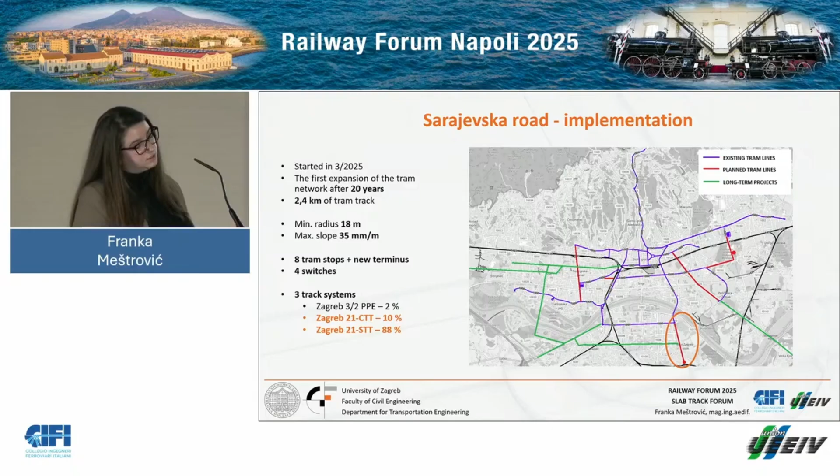Here are some technical details. The minimal radius applied was 18 meters and maximum slope 35 millimeters over a meter. Along the tracks, 8 tram stops will be built, as well as the new terminus, and 4 switches are going to be installed. As for the track systems used, the reference PPE system is used at the beginning, in the area where the tracks connect with the already existing tram loop.

The CTT system is going to be applied here, at the road rail crossing, and here in the area of the turnaround. The STT system is used at the 88% that is left. The CTT is going to be also used here. I would like to emphasize that a new line will be built, hopefully soon.

It will be much easier to connect the new line with this already existing one. As for the implementation, the calculation was done for the load-bearing capacity of the track structure with proper wheel loads this time. A 23 cm thick slab was considered, 200 centimeters wide and 40 meters of length.

Selected sleeper spacing is this time 80 centimeters, while before in Croatia, in Zagreb, it was 100, it was 1 meter. I would also like to emphasize that this new slab is reinforced with additional polypropylene microfibers, so on every cubic meter of concrete, 5 kilograms are added.

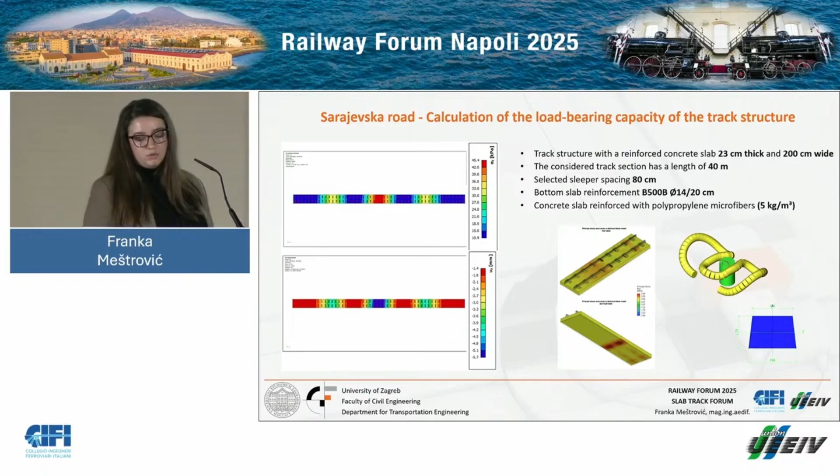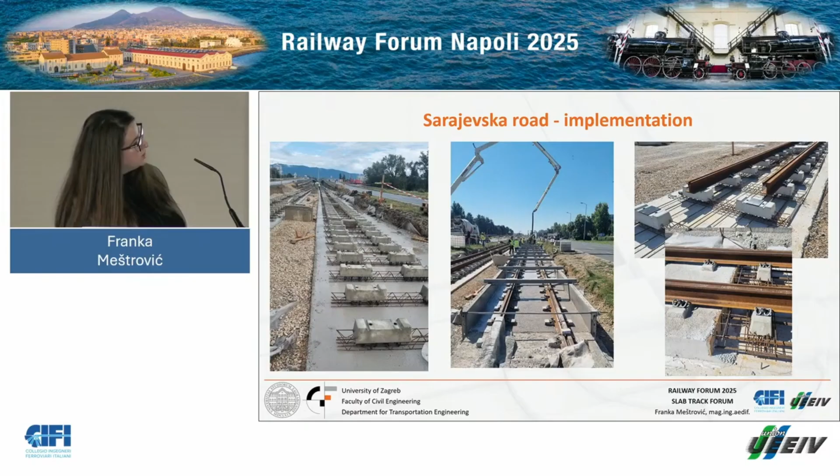So what is next for us? This is considered in the project Eurythmis. The final goal is to implement digital twin technology for predictive maintenance of tram tracks in Zagreb. The project has been going on for 4 years so far, and the idea is that real-time vibration data is collected in the past 2 years from an in-service sensor-equipped tram vehicle operating on the network. We have one tram operated and it switches lines every day. That way we cover the whole network. The idea is that large data sets, machine learning techniques, and digital twin technology will enable us detection of irregularities and defects at various stages of degradation, and thus will lead to predictive maintenance.

A little bit more about future plans. The next step would be intelligent sleeper, or smart sleeper. These are some cross-sections. We are thinking about equipping one sleeper with accelerometers, strain gauges, etc. Those will be the information for the numerical model. We're thinking about placement of the sensors, obviously mid-span as well as on the bearing, and position of the sensors in the track alignment sense, so nowhere near the traffic stops or tram stations, etc.

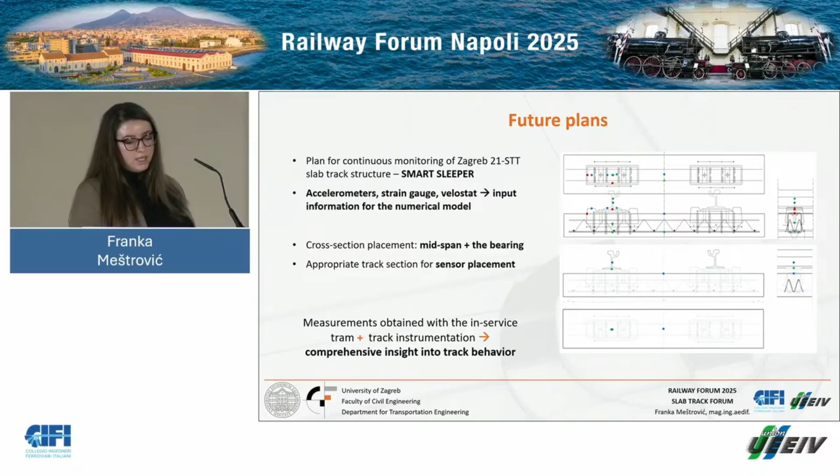The idea is that this track instrumentation combined with in-service tram will give us far more comprehensive insight into track behavior. Apart from that, my current work is in progress. I'm building a numerical model of this track structure. These are just some screenshots, and the verification is in progress.

The idea is to define which parameters will influence most the behavior of the slab track system. We're thinking about varying slab thickness, stiffness and damping coefficients, as well as sleeper spacing. The next steps are obviously model calibration using the data which will be obtained during this smart sleeper or intelligent sleeper integration. The last step is model validation, where some scenarios will be done in order to see how the structure's capabilities perform under new conditions.

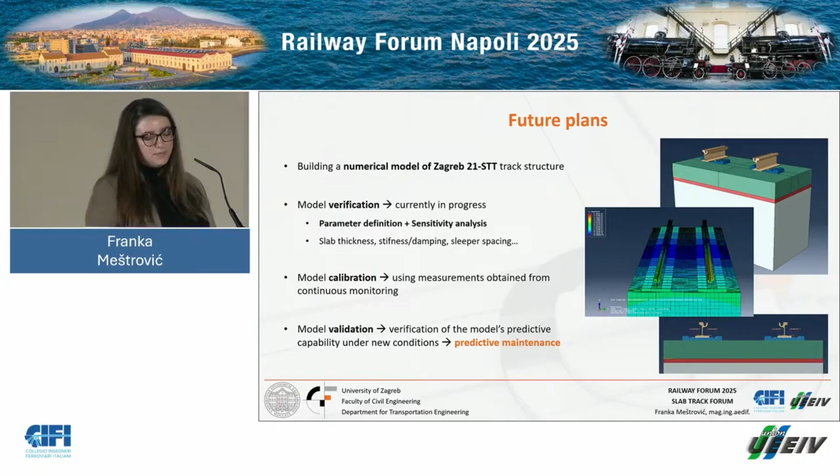Concluding remarks: the system, after 10 years of monitoring, shows as durable and resistant. The option of prefabricated sleepers and modular segments is efficient in installation and maintenance parts. Heavy frequent traffic is a bit of an overreach, but it could be ideal for urban tram networks. Successful deployment along Savska and Sarajevska show possible scalability and cost effectiveness. The idea is to integrate digital twin technology and continuous monitoring, which will enable predictive maintenance, leading to cost reduction, increased operational safety, and improved comfort and reliability of transport.

Thank you very much for your attention, and hopefully we can discuss a bit later.

Thank you very much. Very interesting. So now we come to the question section. Are there any questions from your side? No question at the moment. Everybody will go home.

I have prepared some questions. Let me see. Do you see any conflicts between innovative materials and standardization or certification frameworks currently in use? Yes, please. But it also fits to the other. You can start.